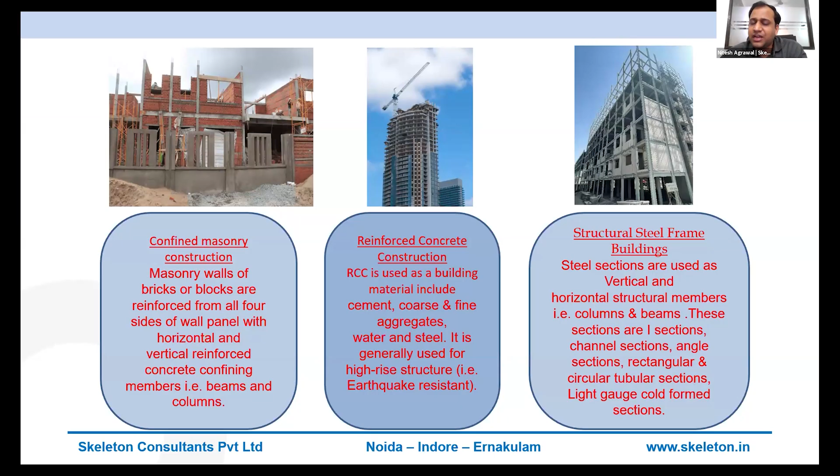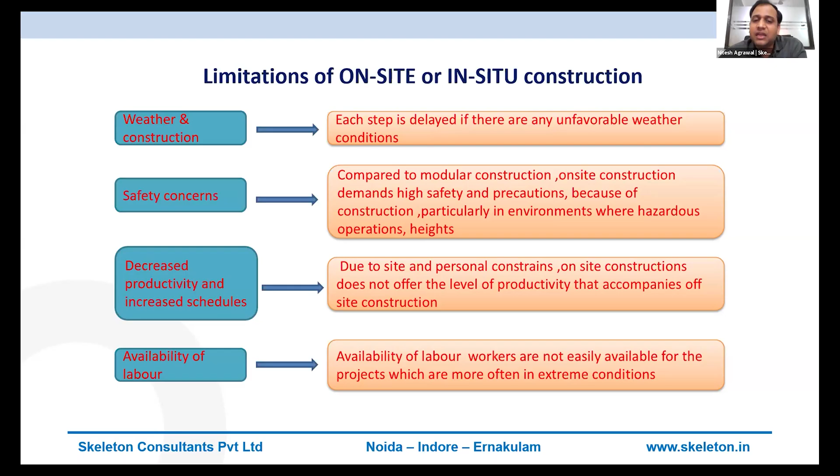Why we are talking about pre-engineered is because it is off-site. And what are the limitations of on-site? RCC construction is very much dependent on weather. There are safety concerns because all the work is happening on the site. There are increased schedules, delays and other things, the productivity is low, it is very labor intensive, and availability of labor these days is very short.

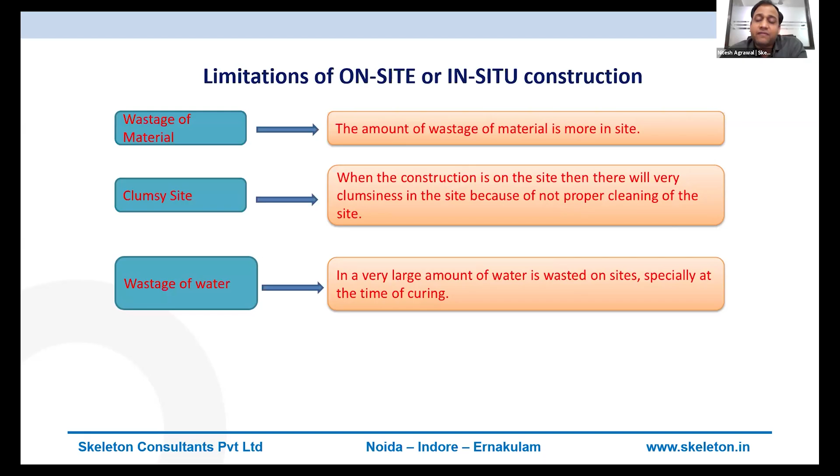Again, wastage of material happens at site. In on-site construction, the site becomes very clumsy and unclean. There are many kinds of raw materials stored somewhere. There are certain places where excavation is done, so the site is not that good to roam around. And there is a very acute point: wastage of water is happening. These things we can somewhat overcome by switching to off-site construction.

In off-site construction, as we have seen from my previous three presenters also, the building time is very short. And since most things are manufactured or produced off-site, the risk of damage is very low. Because we are making them in a controlled environment, our quality is much higher compared to in situ construction. We are in a factory, working in a closed shelter, so for labor we have improved the working environment.

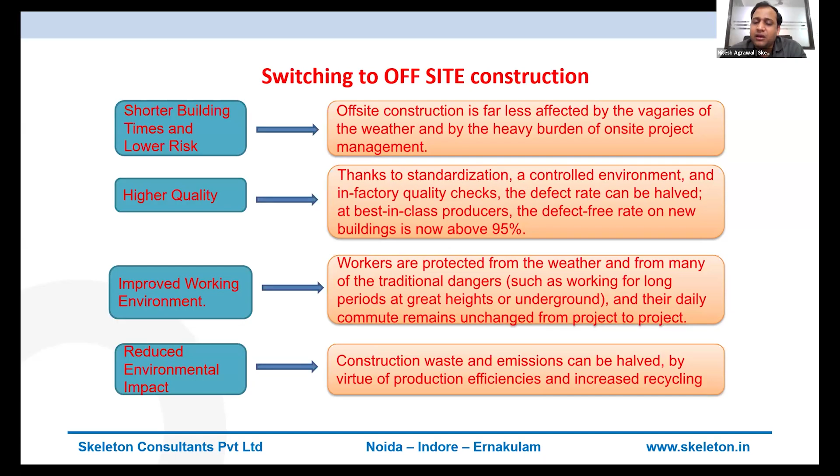And if we talk about environment, we are reducing the impact on the environment. Why? Because the waste is getting reduced. The emissions at the site are getting reduced. Although there are emissions at the factories, the factories are located far away from city centers, so cities are not directly getting affected. The dust pollution and air pollution are getting reduced.

So in the current scenario the world is changing, and so the construction sector should also change, because we have a demand of rapid urbanization. Climate is the urgency; we need to take care of the climate. Over the last 50, 60 years, technology has accelerated a lot. Now we are into the AI era, which can definitely help in construction. Our cities are expanding like anything. Daily we are hearing about high-rise buildings. We are going up and up.

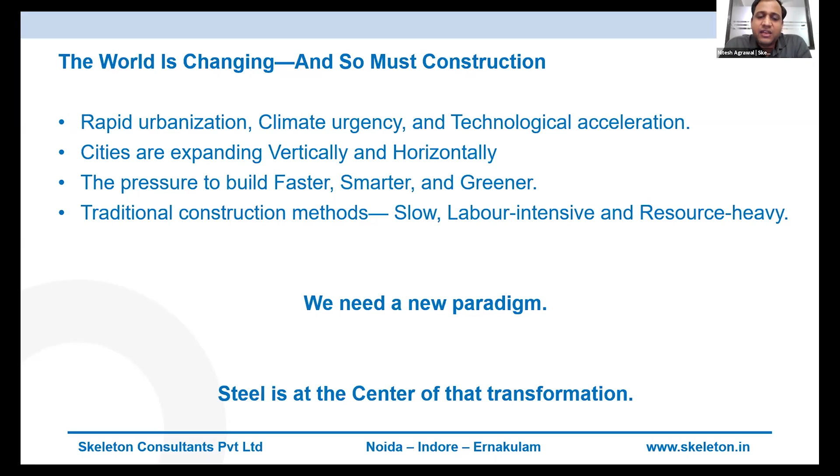We are following the West. Horizontally also, our cities are expanding into extensions. Because of the population of India, we have an urgent need for faster construction of homes. The homes must be smarter now, because people have become technologically smart. And from the environment point of view, they need to be greener. Traditional construction methods, as I said before, are slow, labor intensive, and resource dependent. So that's why we need steel, and steel is at the center of that transformation.

In steel, steel was conventionally being used for so many years, but in the last 30 years, pre-engineered steel has evolved. And now in 2026, we can see that people are much more aware about pre-engineered steel construction. So I'll just brief about what pre-engineered construction is.

Generally, we are designing, fabricating, and manufacturing everything off-site, which was already told by Mr. Sudhir earlier. The last point is that complete planning, including the architecture finishes and structural frames, is all done in advance. There are no changes later on at the construction site.

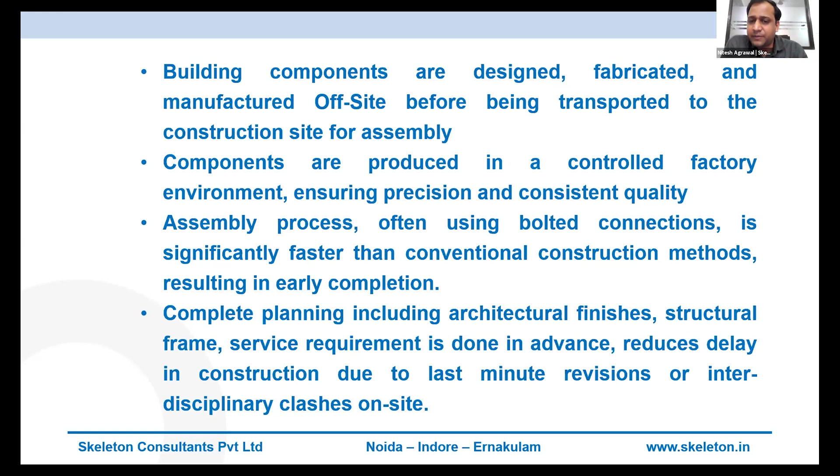So we have done everything in advance, just like Rishabh has said that we are doing everything in BIM. So all clashes and everything have been resolved in advance, so that we are reducing the construction time and last minute revisions on site using pre-engineered construction.

Steel helps in fulfilling the basic requirement of housing: it provides stability. Steel is a very reliable material. It is strong as compared to concrete or other materials. Steel also provides high serviceability and durability to the structures. And if it is used with good planning, it brings good economy. It has a recyclable value, so it's economical to use.

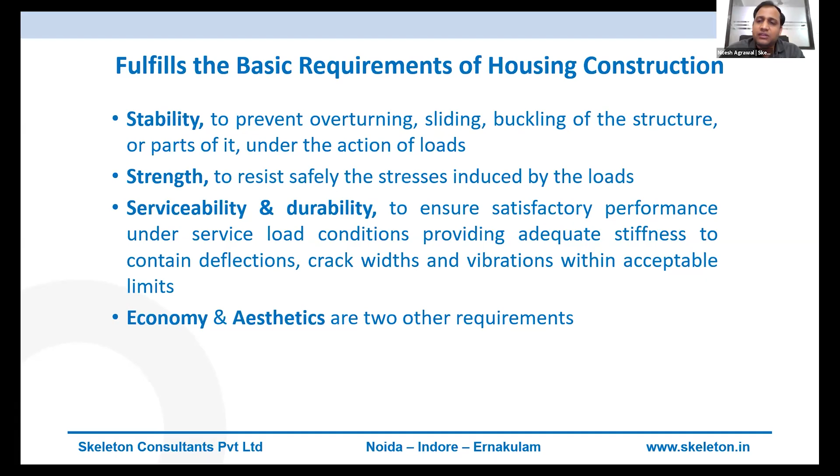And with steel, our architectural friends like to have aesthetically good shapes, good facades, curves in the structure. So this all is possible with steel. So it's aesthetically also very good.

So I'll just briefly go through the advantages pre-engineered steel brings to the housing sector specifically. It reduces the construction time. In the case of housing, as identified by Rishabh, if we do advanced planning, if all the stakeholders, all the parties to the construction are involved from day one of the project, if it has been perceived as a pre-engineered construction, a steel structure building, we can reduce the construction time. And because the steel is manufactured off site and just assembled at the site, we can allow faster occupancy to the occupants.

We have high quality control, so it reduces the maintenance and other tasks later on for the buildings, which are generally very much required in the housing sector because of water leakages and other environmental abuses. Next is low maintenance, and the last one I'll talk about is pollution control and environmental sustainability.

Because the PEB is precisely cut and manufactured, it reduces the material waste, and dust emission, noise emission, air and pollutant emission are very low, and the work is majorly at the factory, not at the site. So that's why we are providing pollution control, and the material is environmentally sustainable. Also, steel is highly recyclable. So it has an initial cost, and at the end we have a scrap value also. So that also helps in our steel construction.

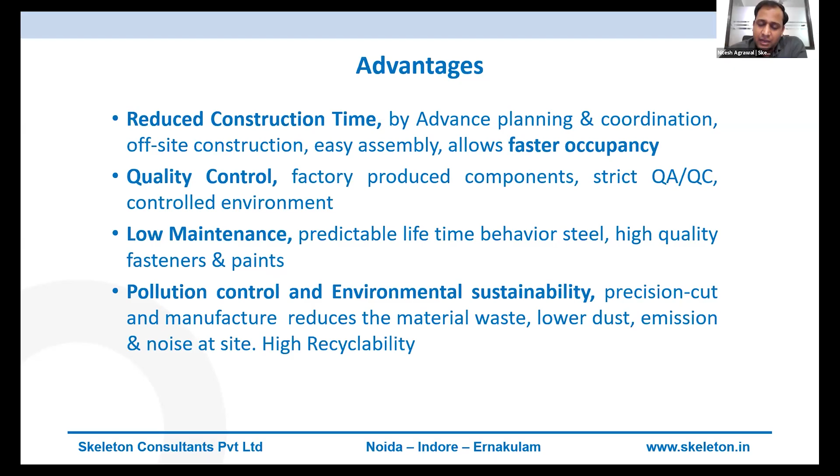If we talk about pre-engineered steel structural systems, currently we have two kinds: in one system we have hot rolled steel sections, and in the other we can use light gauge steel systems. I'll just briefly tell about them. In hot rolled steel construction, we primarily use open sections like I sections or channels, or closed sections like circular hollow sections or square hollow sections. These sections replace the RCC columns and beams with steel columns and steel beams. Even the staircases and other things can be built using steel. So this is the hot rolled steel structure system.

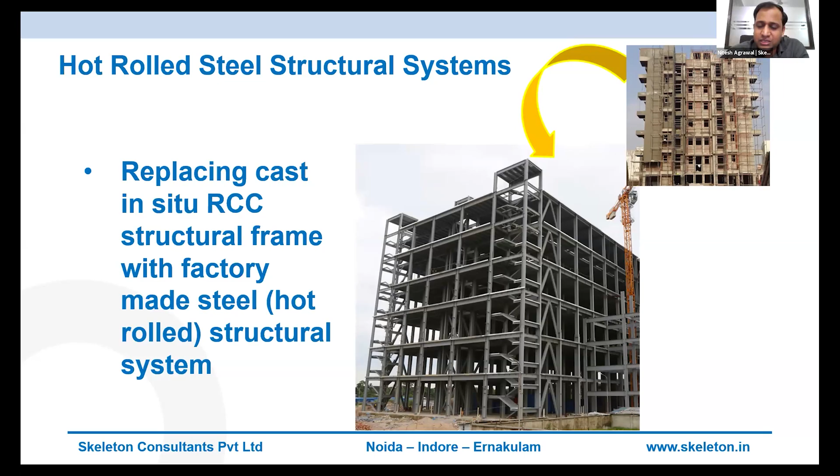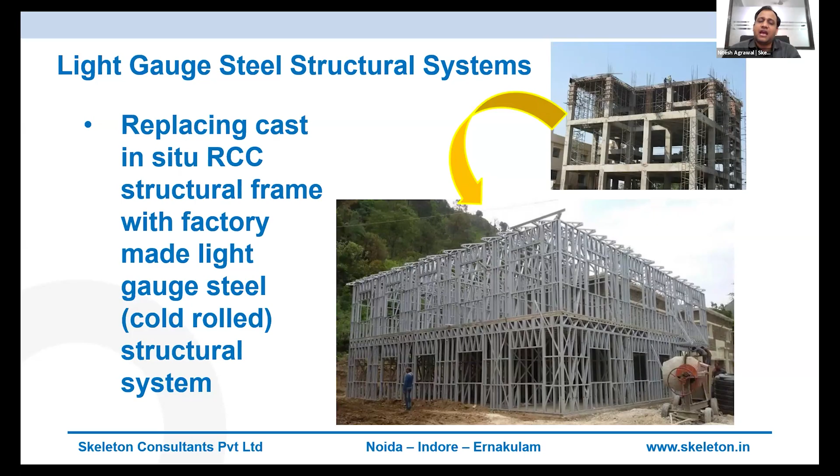And there is one more system where we have light, very thin gauge steel materials, in the range of 0.75 mm thickness to 0.95 mm to 1.5 or 1.7 mm thickness. These sections are very light, and if you see the image in the presentation, the RCC building looks very bulky, and this light gauge frame structure looks very light. So this is one more system which can help in pre-engineering the building sector.

At the start I told that we have done a few housing projects using steel. So I'm just briefing three projects of ours under the PMAY scheme, where the government of India wanted to promote the use of steel, and these three projects were promoted as live laboratories. As the PM said during the inauguration, these are live laboratory projects where we are using steel, new technologies, new components, so that we can understand the challenges, the drawbacks, and where we need improvements. So we were fortunate enough to participate in three such projects.

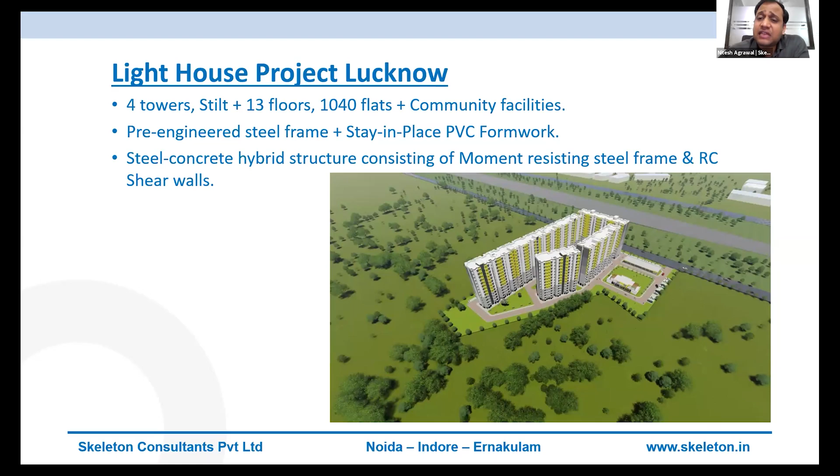The first one was in Indore, which comprises 8 towers. The towers are stilt plus 8 floors. This was for the affordable housing scheme, and here we used a steel and concrete hybrid structural system, where the frames are in steel, and shear walls in the service areas like staircases and lifts were provided in RCC to cater for the lateral forces due to earthquake and wind. A similar type was done for Lucknow, but the interesting part is the towers are 13 floors high, and Lucknow falls in seismic zone 3.

And again, one project was in Agartala. This site has a challenge of low soil bearing capacity. So RCC being bulkier was not thought of, and from day one, steel was the only choice. There were 7 blocks, all of 6 floors each, and Agartala is in seismic zone 5. So you can understand, in a high seismic zone and at a site with low bearing capacity and a high water table, steel is the only solution which can help in realizing that dream of making a housing project at such a location.

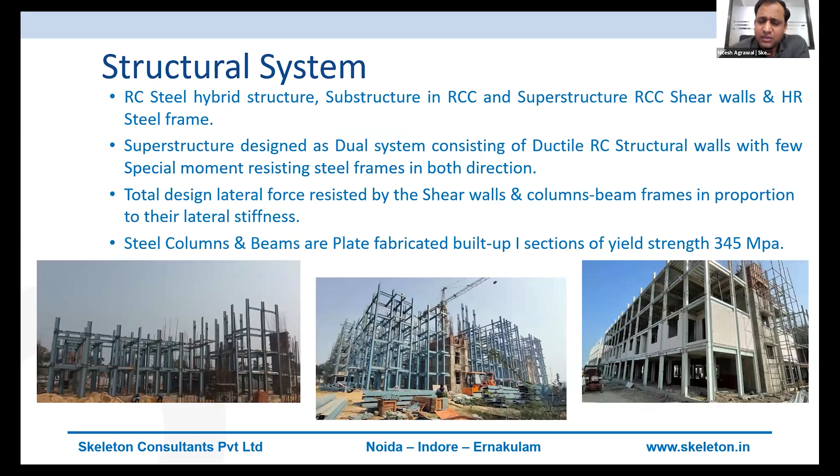This was the structural system which was followed in all these three projects. The construction photographs of these three projects are at the bottom. For the flooring, we have used a deck sheet, and over the deck sheet, a nominal concrete slab was cast with reinforcement to take care of the stresses due to the gravity loads.

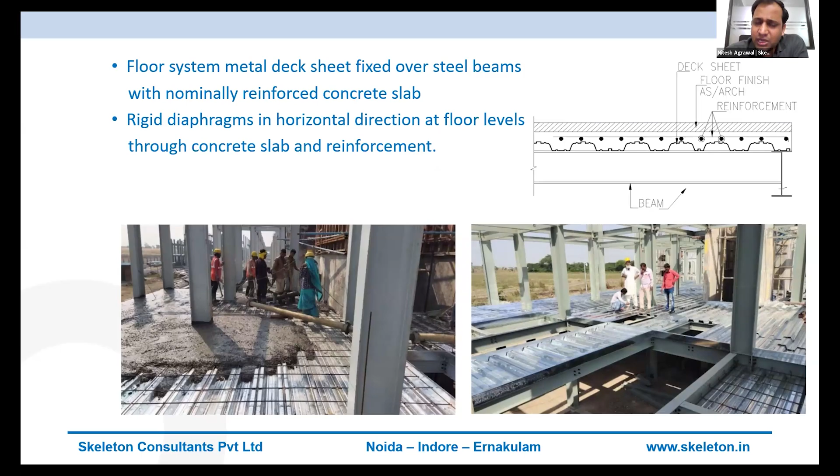Just like was talked about, for software, we have utilized ETABS for accurately analyzing the loads, the patterns and the behavior of this building. We have done the seismic detailing as per chapter 12 of IS 800. With this software, we were able to optimize the demand, and accordingly, we provided sections. And for the housing, we modularized these sections from first floor to second, second to terrace. We have used similar kinds of sections so that it helps in faster erection at the site.

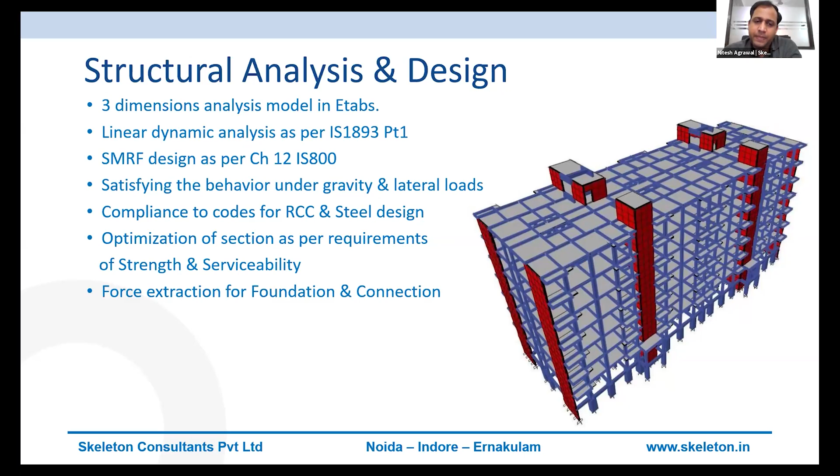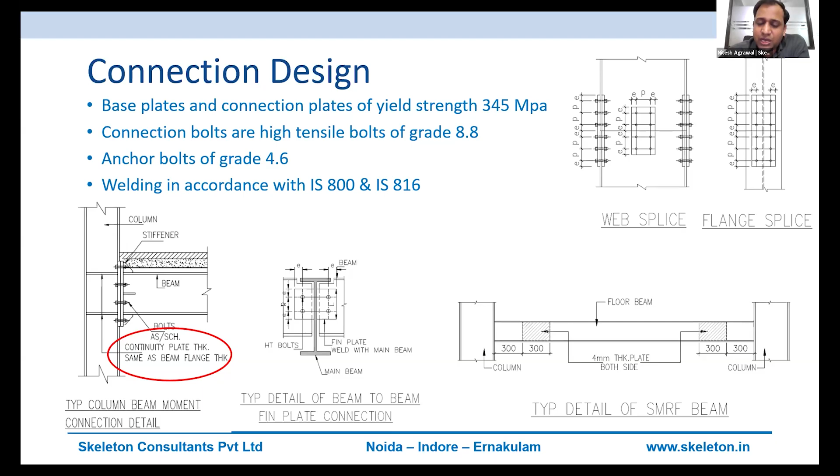This is the major and most important point for steel structures, that connections should be dealt with properly. Accordingly, we have prepared very exhaustive drawings for fabricators and erectors to understand how the connections will happen. And the specifications of the bolts and other materials are clearly mentioned so that there is no mix-up or poor material is used.

So what are the challenges we observed during these projects? I'll just give a brief of those challenges. Unison with all the stakeholders. Let me explain all these points one by one. So unison with all the stakeholders. What happens in such projects? Structural engineers, fabricators, erectors, they are not involved at the initial stages. So it happens that you're not able to conceive or perceive the project in steel.

At the initial stage, we need to understand what material is available at the supplier's end so that the design can happen accordingly. Next, the transporters, the erectors, we need to understand from them what allowances are required in design so that there are no damages or distresses in the material during transportation or erection.

Basic concepts and perception: just like in the industry or in academics, we are taught about RCC construction at the first stage. If we talk about a building, we perceive it as an RCC building only. We generally don't perceive it as a steel building. So that's the need of the hour, that we need to teach everyone that a building needs to be perceived as a steel structure.

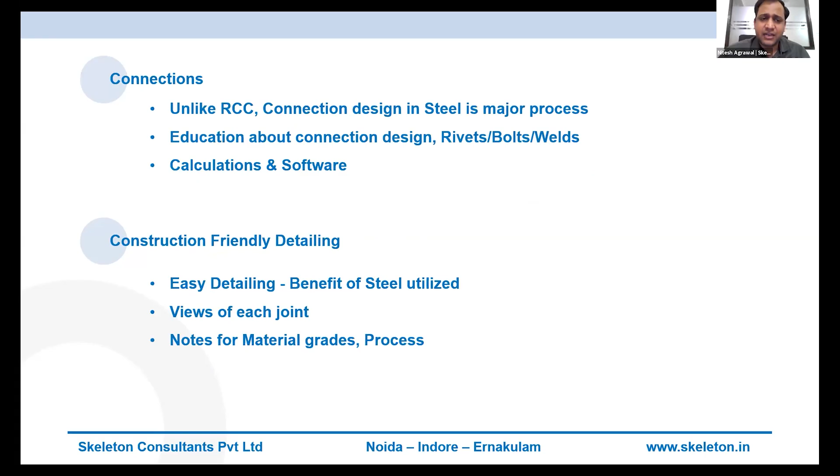So we need to think about masonry and walling options and the non-structural connections to the steel structures. Complex shapes and understanding of the behavior and visualization with steel is much needed. We need to detail the connections to cater for faster erection at the site. Detailing should be construction friendly. Shop drawings and beam drawings should be prepared so that there are no mistakes during fabrication. Fabrication work should be taken care of by very good quality fabricators.

Specifications should be specified very clearly so that there is no deviation because of non-availability of the material. On-site welding should be avoided. Erection should be properly discussed during the initial sizing so that we can amend the member sizes and other things as per the erection requirement. And for maintenance, you should cover the connections and other finishes so that maintenance is easy to do.